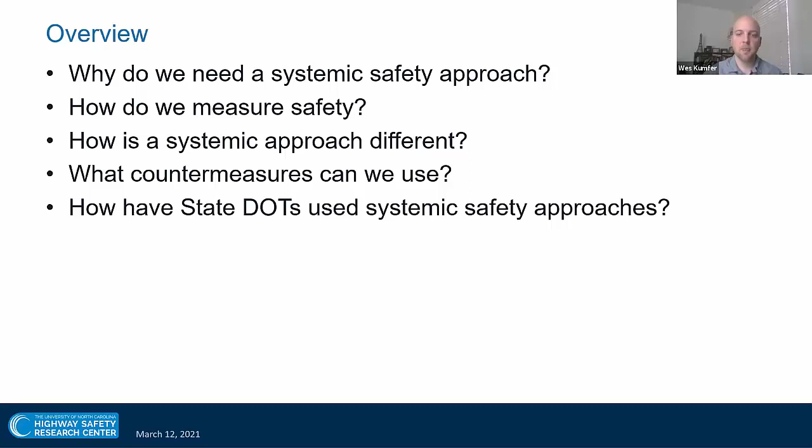But before I get started answering those questions, I want to know just a little bit more about the crowd. So Chad, can you launch poll 1?

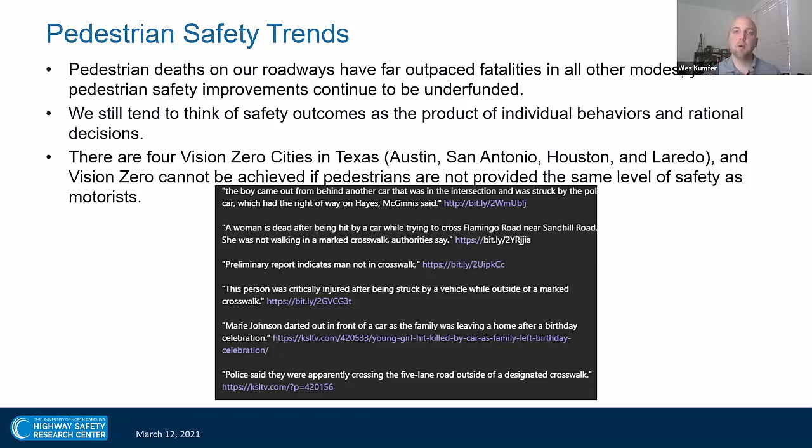My question upon reading those kinds of headlines and seeing these statistics is, why are pedestrians not using crosswalks? And if that's the case, are we misunderstanding the way pedestrians want to use the road and want to travel, and are we therefore not prioritizing their needs to the same degree as other modes? That's what I'm going to try to get at today.

But first I'm going to divert and talk about how we measure safety. This is why I asked that question about what measure you use in your job, because there are a lot of different methods we can use to try to quantify safety. Probably the most common method we use to say whether or not a facility is safe is to look at whether it has a lot of crashes or not.

This leads to traditional transportation safety management, which focuses on addressing hotspots or high crash locations. I think this is a good thing to do, and we need to continue doing hotspot analysis, but I don't think it's the only part of the story. In fact, only treating hotspots misses a broader picture. There are a lot of limitations to it, one being that hotspot analysis is inherently reactive — you see where high crashes occur, and then you install engineering countermeasures there.

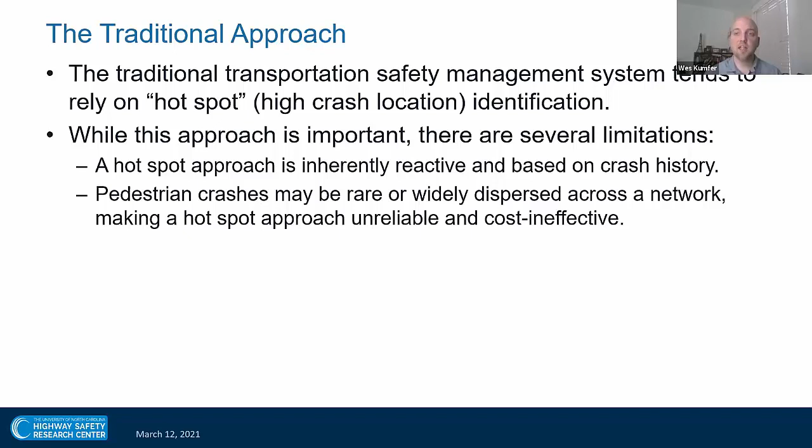Pedestrian crashes may be rare, even though they constitute 20% of total fatalities in Texas. If you look at an actual city's roadway network and where motor vehicle crashes occur, pedestrian crashes tend to be pretty widely dispersed across the network. You may not have locations with 20 crashes happening; you may have one here, one there, one somewhere else, and it can be really hard to identify a hotspot. So it's kind of cost ineffective for pedestrians.

Also, crash risk factors for pedestrians are different than they are for motor vehicles. It should be pretty obvious, but a pedestrian is not shelled in a 4,000-pound steel cage. What puts them at risk is different than what puts a motor vehicle at risk.

Our process for how we identify risks and treat safety is often guided by bad, poor, or missing data. When it comes to pedestrians, unfortunately, a lot of locations just don't collect a lot of data. We make assumptions about where people are walking and what facilities they want to use, but we don't necessarily have that backed up with origin-destination analysis. We don't have counters out there looking at our annual average daily pedestrian traffic. We're kind of missing some of the picture here.

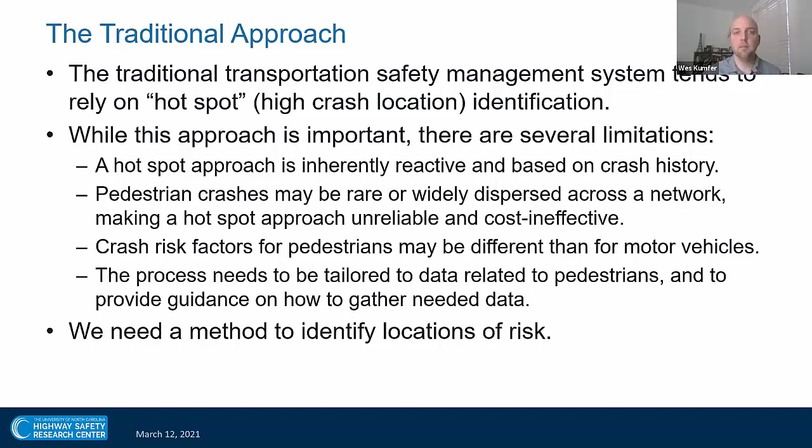So what I would argue we need to do, not necessarily instead of, but in addition to hotspot analysis, is have a risk-based method. One way to do a risk-based network screening approach, several of you mentioned using the Highway Safety Manual. The Highway Safety Manual lays out a series of what are called safety performance functions, or SPFs.

These are essentially just equations that you can use to predict the number of crashes on a facility. A very rough SPF I provided allows you to predict crashes based on your annual average daily traffic and segment length. There are some SPFs in the Highway Safety Manual for pedestrians, but they aren't always the best measures. They're not always calibrated for individual locations, and again, a lot of places are even missing that basic pedestrian exposure variable you need to make accurate predictions.

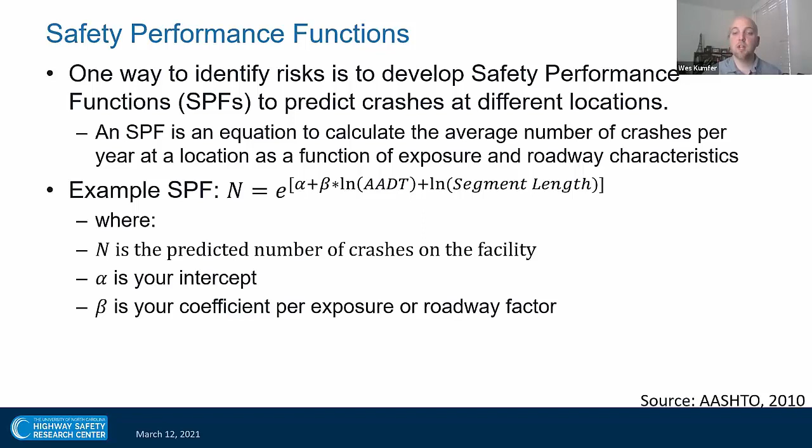I think we should use SPFs instead of crash rates. I saw several folks list crash rates in the chat pod. I think crash rates are good if you're trying to get a very quick sense of safety performance—if you're asking how this facility compares to a very similar facility with similar traffic patterns. A crash rate is a good ratio to say A or B, but it misses a lot of the picture and has some limitations.

Some of those limitations: crash rates can fluctuate significantly with traffic volume. I saw at TRB this year no less than 4 different papers looking at crash patterns in Florida as a result of the pandemic. I think all of us saw that traffic congestion went way down during the pandemic. A crash rate is essentially crash frequency over traffic volume, and if your denominator goes way down, it can change the way your crash rate looks—it doesn't necessarily reflect realistic traffic safety.

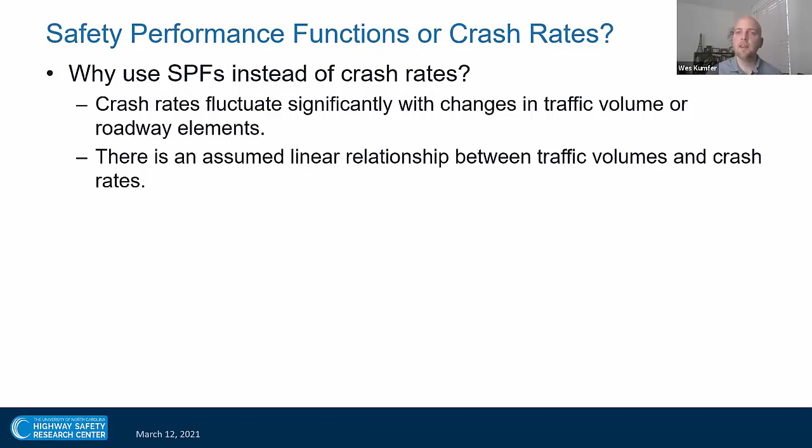And there's an assumed linear relationship there. If you're just looking at a ratio, you assume that as traffic volume goes up, crash rate goes up, and as traffic volume goes down, crash rate goes down. That isn't necessarily always true.

In fact, we recently did a project for the Federal Highway Administration looking at intersection angle—where two roadways meet, what is the ideal angle for intersection. Contrary to a lot of guidance saying 60 degrees is probably good enough, we found that crashes actually peaked between about 55 and 75 degrees. It's actually a curvilinear shape, kind of an upside-down U or an N.

This is true for a lot of roadway parameters—you have kind of a curvilinear shape. It's true for a lot of traffic volumes too; you get changes at very high and very low values of roadway and traffic volume data. So that linear relationship isn't always accurate to assume.

Crash rates can tell us little about the safety effects of roadway features. So if I wanted to know what effect having a sidewalk buffer has on pedestrian crashes, a crash rate can't actually answer that question for me. I need a method that's a little more rigorous.

Crash rates also aren't really comparable between facility types. I mentioned earlier you could use it as a rough ratio between two very similar facilities to make a quick decision and get a sense of where you might have some hotspots. But if you're trying to compare, say, a 6-lane arterial to a 2-lane rural highway, your crash rate isn't really going to accomplish that comparison for you.

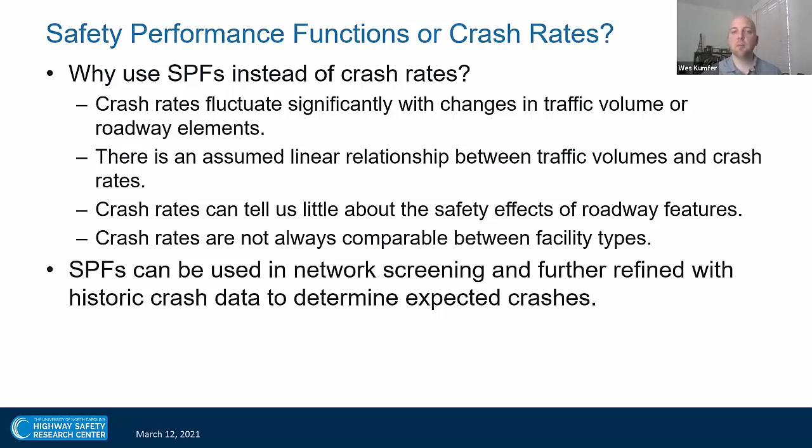Using those to identify what are our common risk factors that exist throughout the network based on our crash data, and then where do we also see these risk factors even if crashes haven't occurred there. An example of that might be a lack of sidewalks on a roadway. So maybe you develop an SPF and find a statistically significant relationship for lack of sidewalks to crashes.

Now, my crash data for pedestrians only tells me that these 3 intersections have crashes right now. But I see that there are similar roadway types that also are lacking sidewalks and maybe have similar traffic volumes and pedestrian volumes as these 3 elsewhere in the network. Maybe those also should be addressed because those might also be sites of risk.

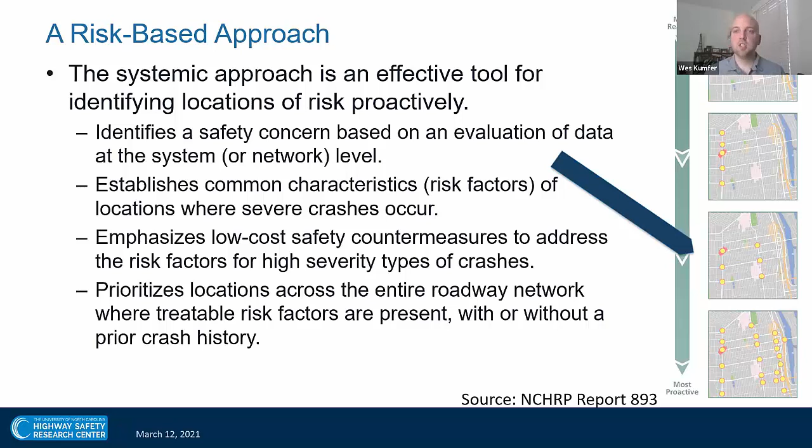So you can use this systemic approach, this risk-based approach, to actually be proactive and find all of your locations that might be problems, and then you can actually prevent crashes in the future. So you can move from addressing crashes that have already occurred to preventing crashes that will occur.

And I think this gets at the idea of the safety individualism that I hinted at earlier - how it is that crashes actually happen. If I were to survey the group, I'm sure I would hear that literally everyone on this call has probably heard that all crashes, or 94% of crashes, are the result of driver error.

It's something that I read a lot when I was first going through graduate school, that I even put in some of my papers. I've heard it at pretty much every TRB meeting I've ever been in. And unfortunately, it's actually a misunderstanding of the report where that statistic came from.

So that report actually says that while 94% of the crashes observed did have human or driver error involved, that driver error was actually the last causal factor in the causal chain. There were a series of other issues that lined up, and then driver error was produced, and then that resulted in a crash. So it was kind of the last thing that knocked over the dominoes, if you will.

And what this is getting at is this idea of latent risk in our environment. So in the way we have prioritized roadway investment in this country, it's really around automobile mobility. And whenever we are prioritizing automobiles, we are creating an environment that can be hostile toward pedestrians. It's not always, but pedestrians are much more susceptible to speed, much more susceptible to mass, and they just aren't protected by a steel shell.

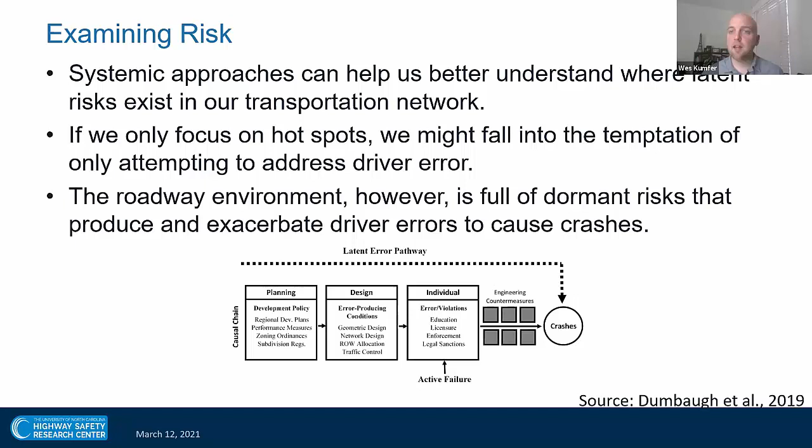So if we are prioritizing pedestrian safety, we may do designs that don't necessarily fit into our scheme of how we prioritize motor vehicle needs, but they can help address some of these crashes. This is an idea of moving away from this paradigm that all crashes are caused by driver error, so we just need to install enforcement or education—often used more than engineering countermeasures—and that'll prevent crashes. Instead, we're moving to an understanding that there's a latent error pathway, that we have risks built into our environment that influence the amount of driver error that happens, resulting in crashes, especially severe and fatal ones.

So what I would argue is that if we want to address that very troubling pedestrian crash trend, we need to try to be proactive, and we need to look at these latent risks, and think about the way we design our roadways to make sure we're not just giving pedestrians short change.

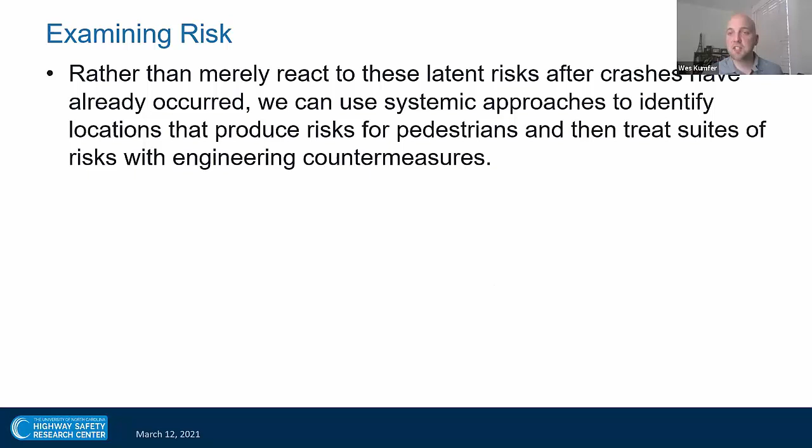A couple examples here. This looks like a pretty good 4-lane arterial. It actually has a nice division there with some trees in it, good tree cover. In some ways this looks like it might be nice and safe, but then you see that for some reason there's a utility pole just right in the middle of the sidewalk. So when you see a media report that says the pedestrian wasn't in the crosswalk for some reason, it might actually be worth going and looking at where the crash occurred—maybe there was a utility pole in the middle of the sidewalk, or some other issue that caused that pedestrian to step into the roadway and get hit by a car.

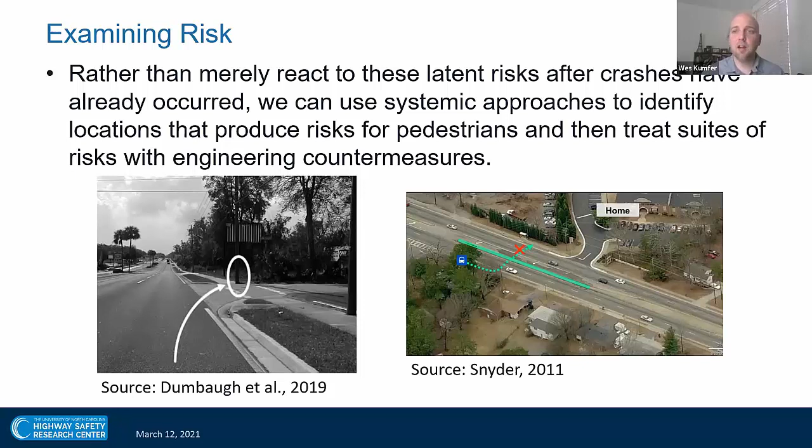You might also consider: where have we placed our transit stops and other facilities? Does this actually conform to the way pedestrians need to use the roadway to access their destinations? If you do an OD analysis looking at where pedestrians are coming and going—say they're trying to go from this transit location across a 4-lane arterial with a left turn lane in the middle, over to their home—there's no crosswalk here. A lot of times our expectation is that pedestrians will walk half a mile, maybe a mile, down to the next intersection, cross there, and walk all the way back. That's kind of unfair and unrealistic, especially given that we've already prioritized a high degree of access and mobility and turning maneuvers to motor vehicles. So good engineering practice might be to look at whether we have transit stops and make sure there's a crosswalk at every single transit stop.

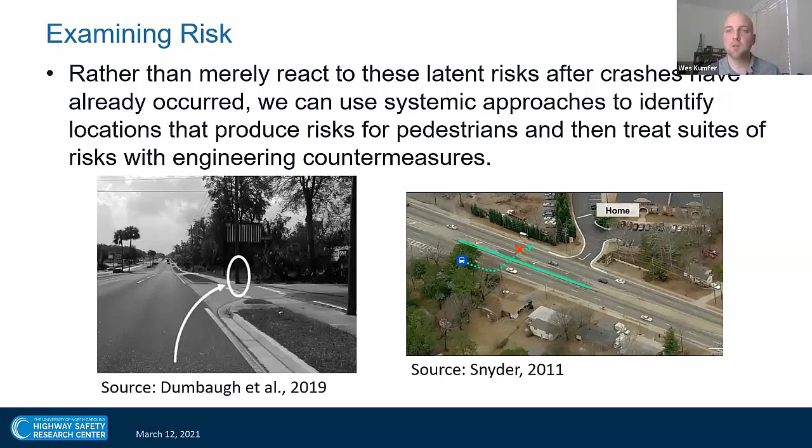What I'm trying to get at is we need to think about the way we've designed and built our roadway. Does that meet realistic expectations of environmental risk? Are we creating more risks by the way we design things, or are we mitigating risks? That is a way I think the systemic approach differs from traditional traffic safety management.

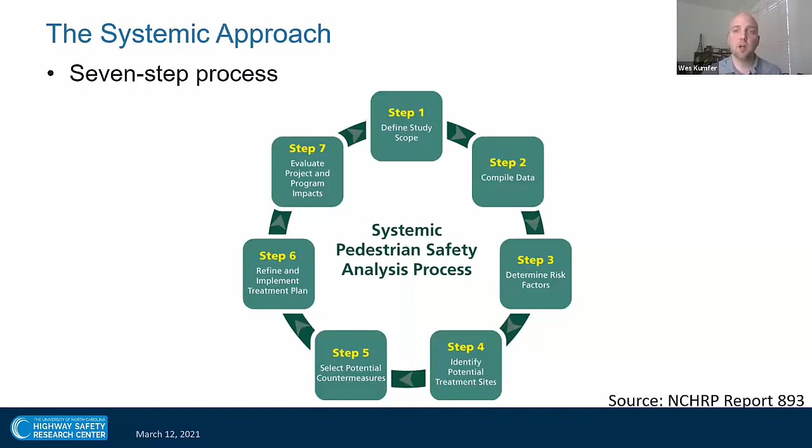So in this project, we laid out a 7-step process. I'm really only going to focus on the first 5, although 6 and 7 are important. You want to start out by defining your study scope. For the systemic process in this report, we worked with the city of Seattle and looked at 23,636 roadway segments throughout the city.

We started with a crash tree to identify which crash types might be most treatable with engineering countermeasures. I'll show you this crash tree on the next page, but what we found is that crashes between vehicles traveling straight and pedestrians crossing the street on segments suggest locations where pedestrians are crossing and getting hit by cars traveling straight. There were 802 crashes of that kind in the data. We also looked at crashes between pedestrians and vehicles at night on segments. We're not looking at intersection crashes in this particular study—that came in a previous study. I won't address that here, but there are systemic treatments for intersections as well.

So we looked at 8 years of crash data from 2007 to 2014, and we tried to capture different parameters and variables related to roadway design, traffic volumes, our population, and our development types.

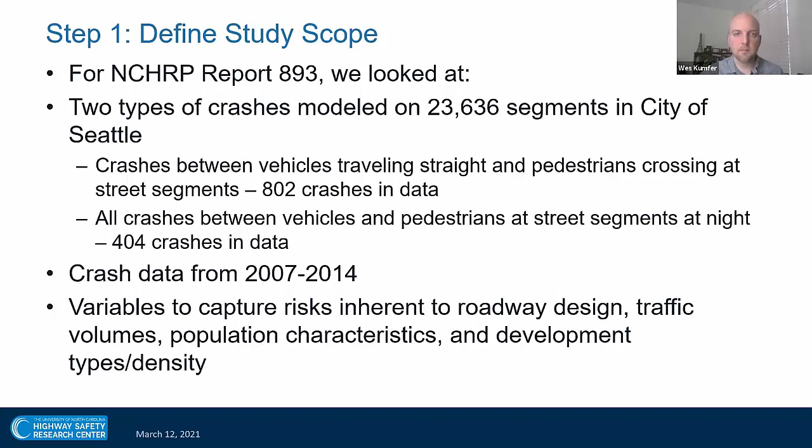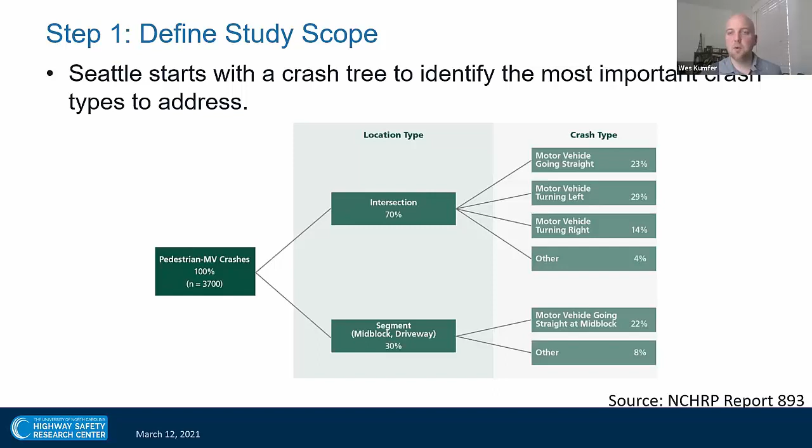So this is that crash tree I was talking about. In the city of Seattle, 30% of the crashes with pedestrians were occurring along segments, not within the intersection influence area. We found that 22% of those were occurring when motor vehicles were just going straight. The rest were other, which is why we looked at those nighttime crashes.

And then we pulled a bunch of data together for the second step of compiling our data. We wanted to look beyond just the engineering principles. We wanted to really understand what is the context in which people are walking, and why they would be walking along certain segments.

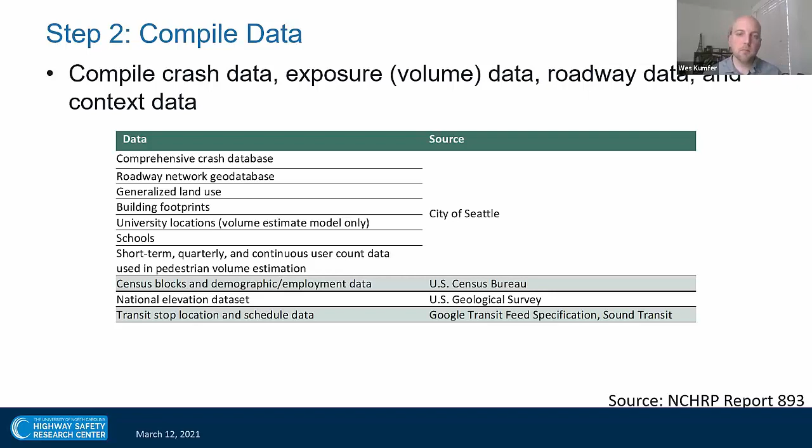So that's where you pull things like, where are university locations? What is the median income of an area? Where are the attractors and generators of our trips? What is the commercial density that might be attracting pedestrians to be walking along this segment? And where are the transit stops?

Now you'll note, even just in the snippet that I've shown you here, that there are a lot of segments where pedestrian crashes don't occur. And this again speaks to that highly dispersed nature of pedestrian crashes.

So the third step is to develop our risk factors. The way we went about doing this was by programming some safety performance functions, building these models. So we had a 2-step approach. I don't really want to spend too much time on this first one.

It's called conditional random forest regression. Basically, you take all of the data that you have, all of the individual factors, and use some machine learning to essentially look at which of these factors pop up most frequently in relation to crashes within the broader crash tree. And that narrowed it down to about 30 factors that we could then examine.

And then I took those 30 factors and did what's called negative binomial regression. Regression is just the act of fitting crash data to a straight line. Negative binomial regression is a way of doing that while avoiding some of the biases that can come from seasonality and regression-to-the-mean type behavior over the period of this analysis.

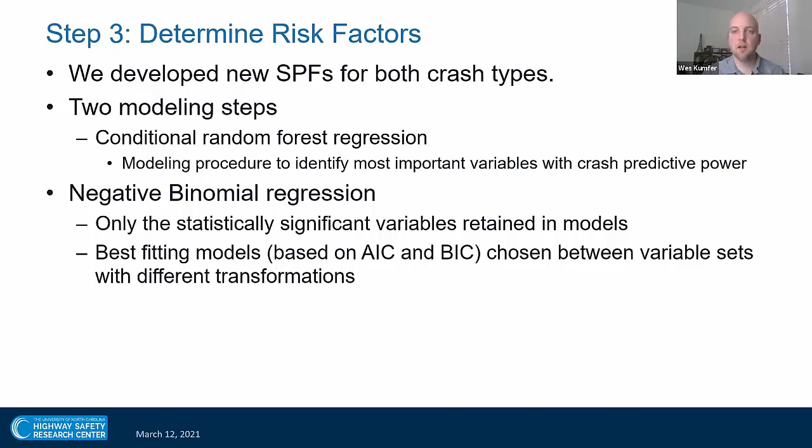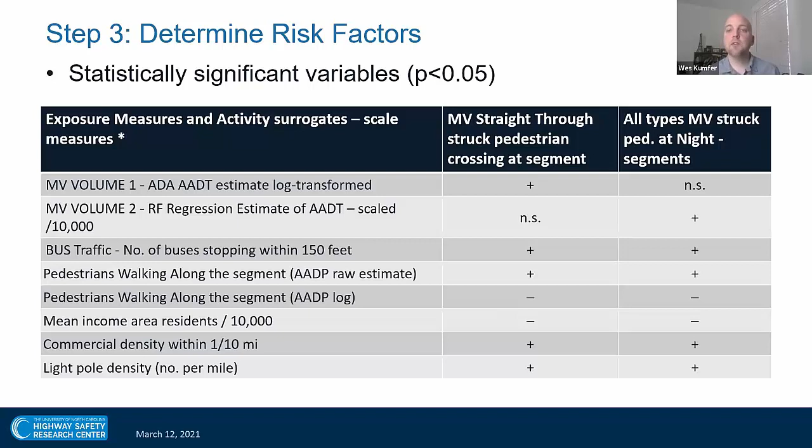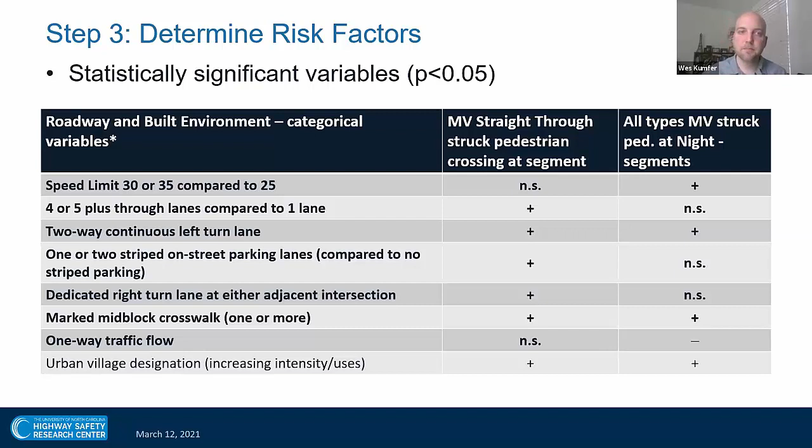Striped parking can lead to situations where drivers don't necessarily see pedestrians. Dedicated right turn lanes, already addressed. Marked mid-block crosswalks - again, I don't think these actually increase risk to a pedestrian. I think it's a place where pedestrians are likely to be found and therefore hit. So one way to think about it is that this might be displacing risk over a larger area.

After we've identified these potential risk factors, we want to find countermeasures we can use. We worked with the city of Seattle to look at locations where crashes are occurring and then identify countermeasures that can be applied across many of those locations.

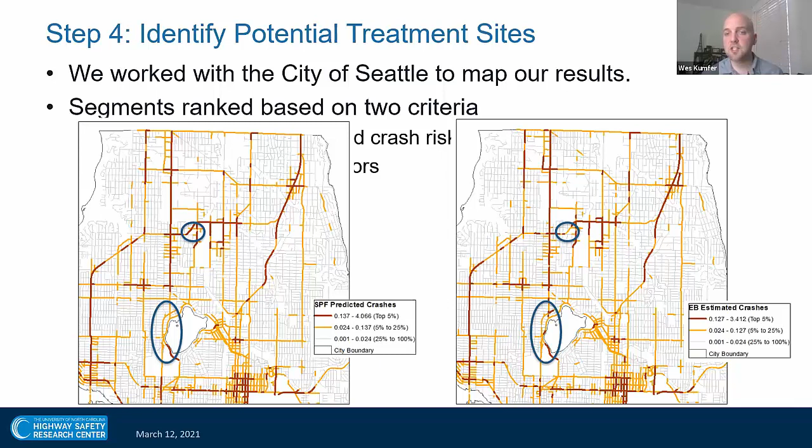Aside from two circles showing a couple differences, for the most part both maps show high-risk corridors, pretty consistent high-risk corridors. This leads us to: we know where these crashes are occurring, so if we're focusing on our mid-block locations, those segments, how can we treat those?

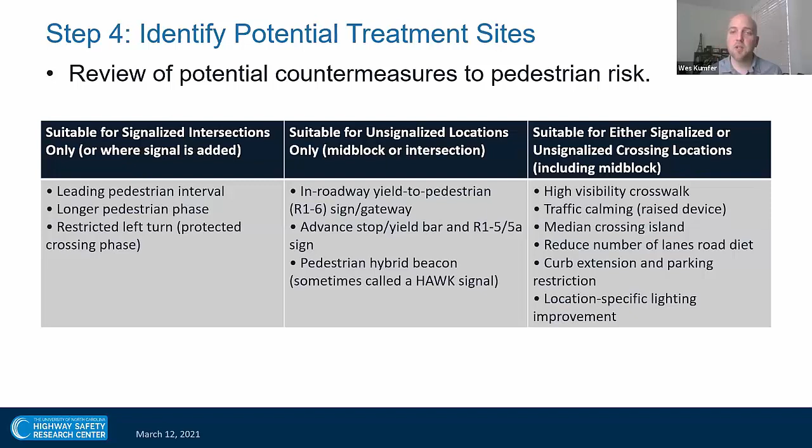We can do things like in-roadway yield to pedestrian signs, advance stop/yield bars, pedestrian hybrid beacons, high-vis crosswalks, traffic calming like speed humps or speed bumps. We can reduce the number of lanes through a road diet. I was excited to see your next presentation will be about complete streets programs - road diets are a good way to address some of these safety concerns. Curb extensions and lighting improvements can help improve visibility for pedestrians.

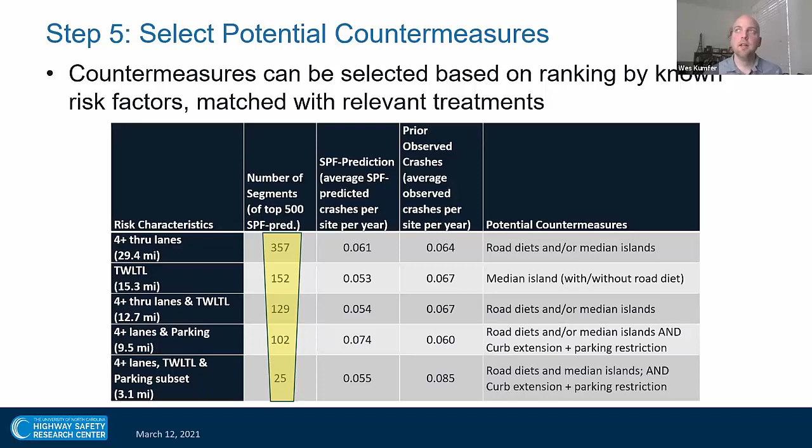You'll notice we have basically just fractions of crashes predicted at each of these sites. That's due to the wide dispersal of crashes. A fraction of a crash essentially means we predict a crash could occur here. This is a known risk location.

And then looking at other things—if we have a lot of crashes occurring on mid-block crosswalks, we could do things like high visibility crosswalks, or HAWK signals, and so on.

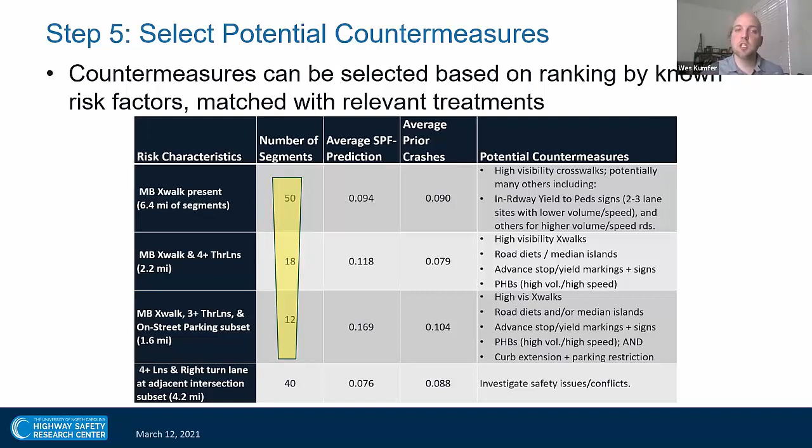So once you have your SPF, you could put it in a spreadsheet and filter to find a series of segments that you can treat. I think this is an important approach to treat these segments through a safe system project.

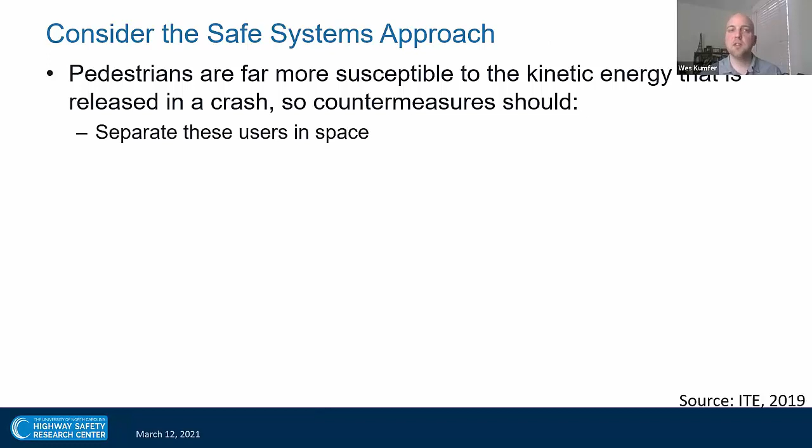Why I think this is so important is because pedestrians are susceptible to kinetic energy. ITE recently published guidance based on a safe system principle that talks about how, if we're going to prioritize safety and address this trend in pedestrian fatalities, we have to consider things like separating our users in space, separating our users in time, and managing our speeds and mass heterogeneity.

So do we have really heavy vehicles driving quickly in places where pedestrians would like to be walking? This is why it's important to understand roadway context. And then, can we anticipate human error?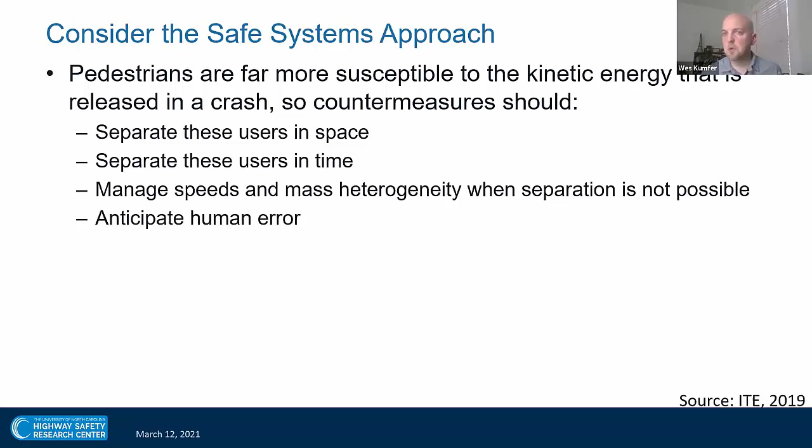So if we know that drivers are going to speed when we give them a bunch of very wide lanes, anticipating human error might lead us to reduce our lane width, or to not have so many lanes of traffic going through here.

I think it's really important to consider these principles when we're talking about pedestrians and looking at systemic treatments, because pedestrians are super susceptible to kinetic energy.

A lot of research has shown that as you increase the speed limit, it results in a higher impact speed, which significantly increases your risk of death. So for someone in a vehicle traveling at 45 miles per hour, your own risk of death probably isn't that high. But if you have a posted speed limit of 45 miles per hour, assuming people drive plus or minus 3 miles per hour, that's about a 50% risk of fatality for pedestrians.

It's very different for our most vulnerable road users. I think if we want an equitable and safe distribution of risk throughout a roadway environment, we need to look at who is most susceptible within that environment.

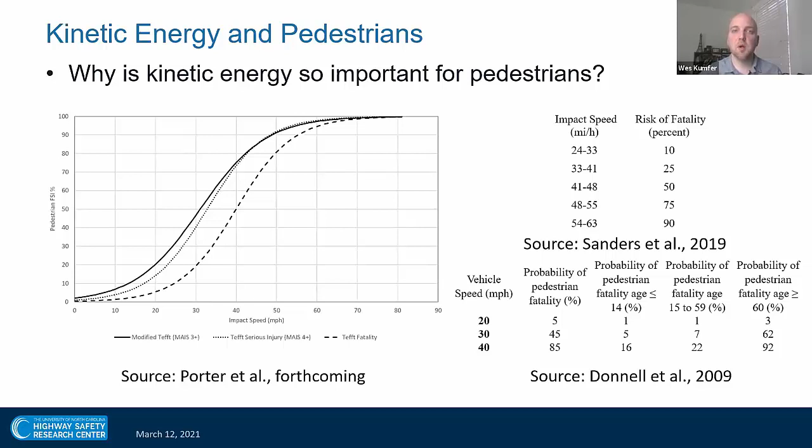Some examples of how we can fit these systemic treatments into a safe system: the road diets I've mentioned can help with speed management, and HAWK beacons—pedestrian hybrid beacons—provide separation in time, giving pedestrians a space to walk where they're less at risk.

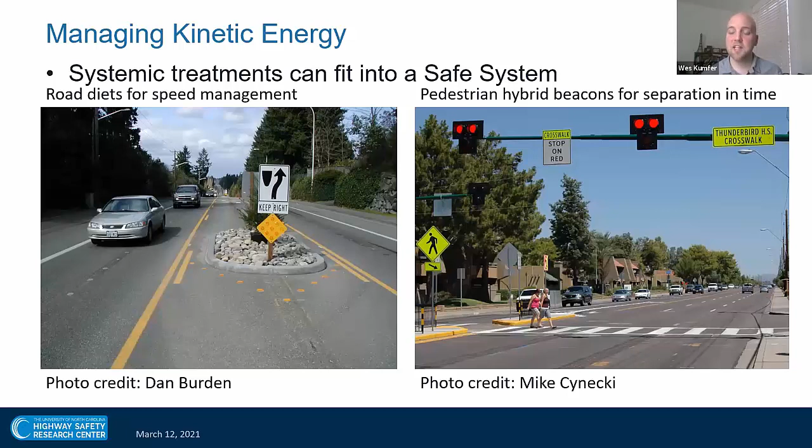As I mentioned earlier, step 6—step 7 of the process—is to refine and implement our treatment plan and continue to look at our program impacts. These were outside the scope of this project, but I do think they're very important.

Step 6 is where you might use a benefit cost ratio. Now, I would actually argue that if you're trying to quantify the benefits of addressing pedestrian safety, you can get really good return on investment by looking at locations that have been traditionally underserved. Our high-income areas often have better facilities than our low-income areas, and we might get the best return on investment by removing some of this risk from our low-income areas equitably.

Under a systemic approach, you may not get as many of those hot spots, and you may not see a huge crash reduction at individual sites, but you might be able to spread out a lower crash reduction likelihood for lower cost across a huge number of sites within your network.

So a lot of states are now adopting the systemic safety approach through a variety of measures. NCHRP Report 893, which you can find online if you're interested, lists several different case studies. I'll cover two after this. It also has the stuff from Seattle in there.

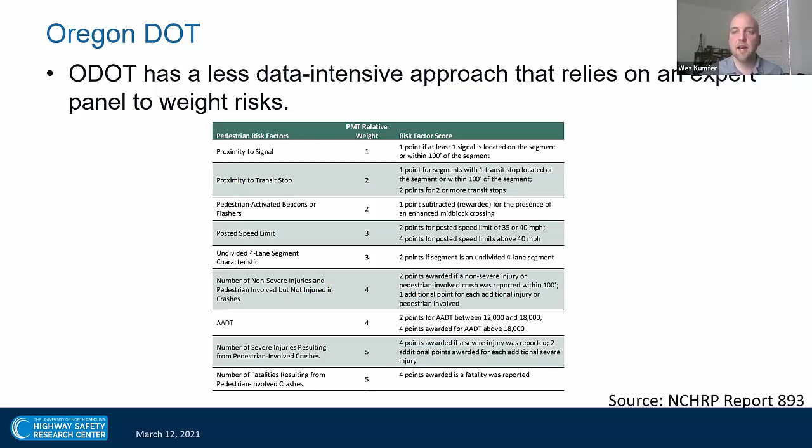Arizona DOT worked with Kimley Horn to do something similar. They also had a less data intensive approach. They assigned weights based on factors found in research, especially looking at width of roadways and posted travel speeds, and then ranked sites for systemic improvements based on that.

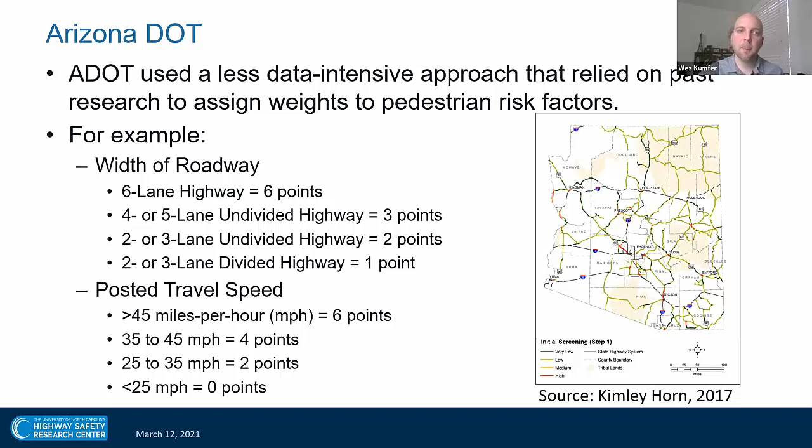So in conclusion, I would argue that because pedestrian fatalities in this country are just exploding, it's a super problematic trend. It's because we've built a lot of risk into our environments. If we want to address those risks, we need to find a way to find those risks systemically, because they don't necessarily pop up at hotspots. So we may want to look at things like context and exposure, where people are walking, to figure out where we can get the best use of our systemic treatments.

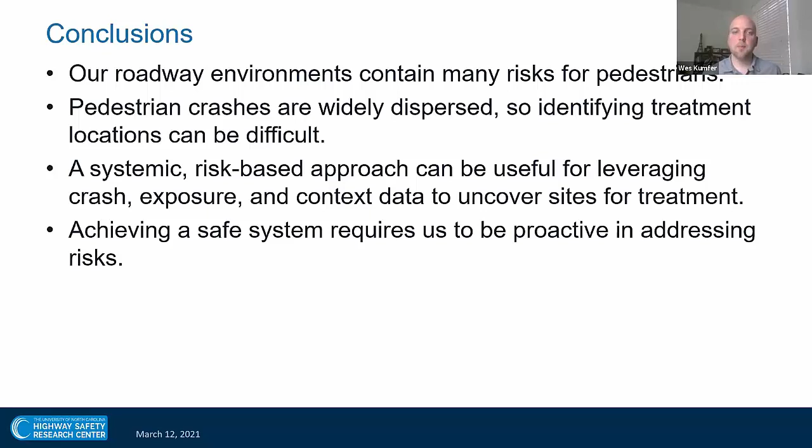I will take questions for the last 12 minutes or so.

Before we go into questions, I want to bring up a point that Stephen Ratzke made. There is a webinar put on by FHWA that's linking the safe systems approach with HSIP and SHSPs. If you're interested in further information on this, that will probably be a good webinar to attend. I think Sarah Abel from ITE was actually one of the lead authors on the report that might be about, if it's what I'm thinking of.